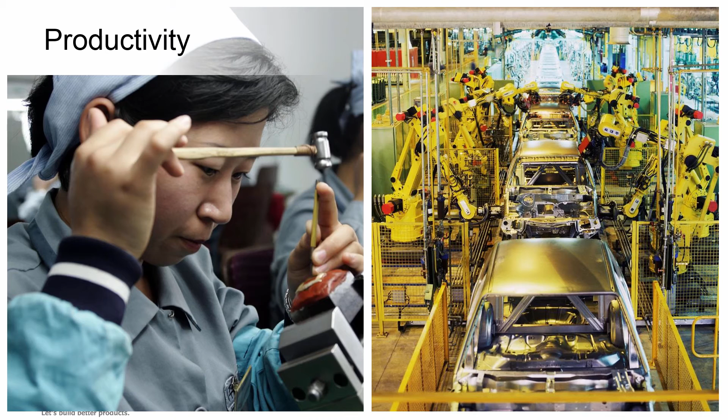And again, what's important for me is, I want to make sure we don't just jump in and show you the product, although I know that's important. That's probably what a lot of you want to see. But what I like to understand, especially as a customer of any product, is where is a company headed? Why is Autodesk, in this case, why is KETIV investing in building Inventor into more than just a modeling tool?

When you look at all of us today, and I work with many of the customers that I see on this presentation, for the most part, there's really three areas that all customers in manufacturing are looking to improve. You create a product, and you're either looking to increase your productivity, and there's multiple ways to increase productivity through manufacturing methods, the way you're assembling your product, the way information flows throughout your business. So, all of us have opportunity to increase productivity. That's pretty common with all customers.

The other common theme is just innovation, right? Most customers really want to come up with ways and develop their product that's unique, has features that are customer focused, and we see that every day. Whether it's a Google Glass or drones and new technology that's coming out today, things change so fast, we all know it's very difficult to remain the most innovative company in an industry. But again, it's something that a lot of our customers are striving to do. So we look at companies increasing process. Typically, they want to figure out ways to better innovate their product.

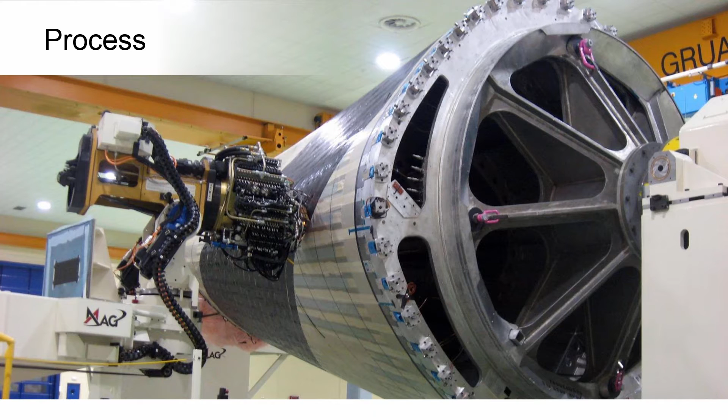And then the third is process, okay? And process can be improved through a variety of means. I mean, just looking at how information flows throughout a manufacturer. I was with a customer recently, and while the customer wanted to look at how information was managed in engineering, sometimes it makes sense to step back and say, let me take a look at how information begins in sales. How do I sell my product?

And then once I sell my product, how does that information move into engineering? And then we can kind of follow the information and see if there are areas in a business that we can improve. And so sometimes, like I say, it takes just stepping out of the engineering area.

But again, just to recap, productivity, innovation, process, as we talk to customers, those are common themes that all customers in manufacturing are typically looking to improve.

Now, what's happening in the industry, and many of you, I'm sure, have heard, some of you have already implemented and are seeing some of these impact the development of your product. But there are many trends, many new technologies that are becoming available, and becoming available to all size manufacturers, that are really changing the way we have to look at developing our product.

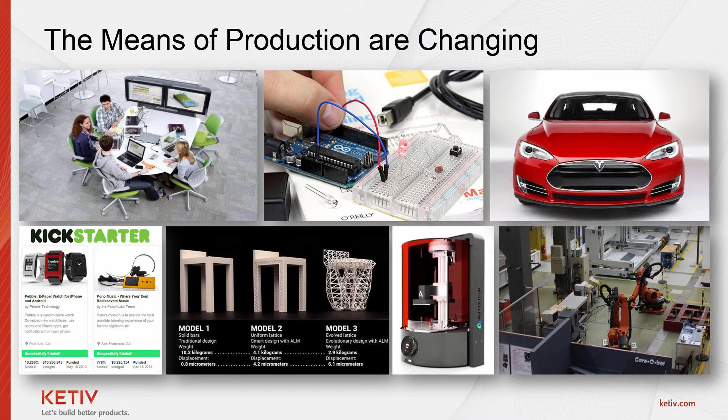Okay, and those trends really revolve around production, the demand, how our customers are looking at our product, what they expect from a product today, and then how those products are connected and stay alive, if you will, as we move forward. Okay, and when you talk about production as an example, I pulled up a few examples here that I'm sure many of you are familiar with.

The production methods around just the way we can 3D print products. I know several of you, I'm looking at the list of attendees, are used to and incorporating some of those methods today because the ability to rapidly produce a product, go from an idea to a real product, is making us rethink how we design a product.

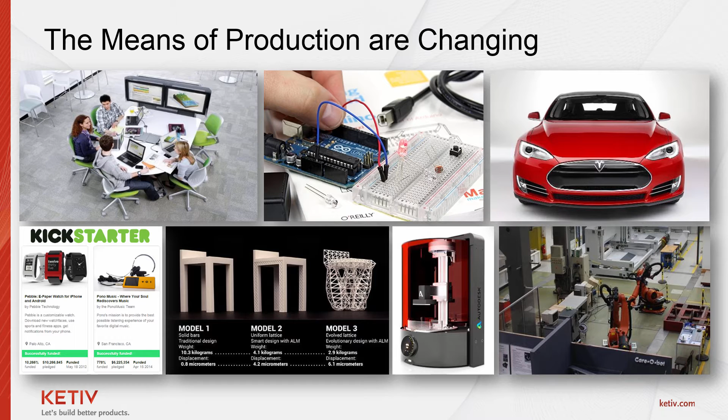So if you look at this chair down below, and Jorge will probably talk about this a little bit more, because technology is changing, because we have things like cloud processing available, this chair is an example where, as an engineer, rather than focusing on modeling a product, worrying about what the geometry looks like, I can now focus on the inputs of the product.

What is the criteria of the product? What sort of envelope does it have to fit within? How much weight does it have to hold? What kind of material is it going to be made from? And the computer can now create the geometry for me.

And if you look on the far right of the chair, you see a chair that looks like something likely no human would really imagine or design or model for that matter. But the computer has found that that is the optimal design, the optimal shape to meet the requirements necessary. The user did not do the modeling, the computer did. And these are things that are changing as we look forward and at the technology.

The other area is just product intelligence. All of us, I'm sure, are using products that are connected today. I have a home with Nest. We recently implemented Nest in our house, and the ability for me to now control the heat and coolness in my house from anywhere really has changed the way we use that sort of equipment in our house. It's reduced the electricity bill for heating and cooling the house.

And so all of us have examples, I'm sure, where we're using products that aren't dead products, if you will. They're really alive. They keep up to date on trends and habits and get to know how we work as individuals. And this is another area, again, that's forcing customers that I talk to to look at how they can better create their design and differentiate their design.

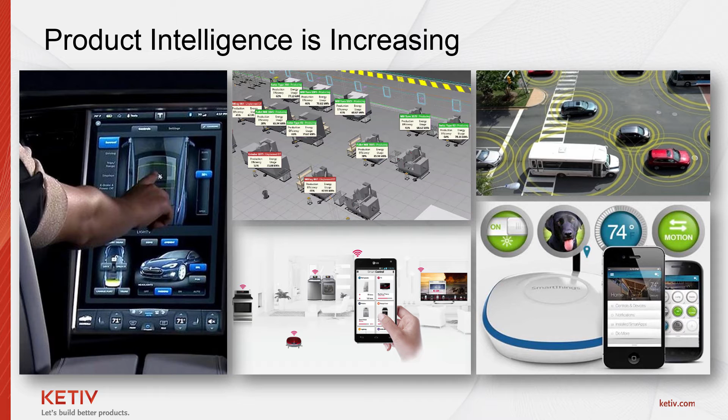Our customers' demands are also changing, and again, all of us are customers of something, right? Whether we're customers of a product or food or cars or whatever the case is, I think we can all think of examples of how our demands are actually changing for products we buy. I know when I go and buy products personally now, or with my kids, my kids are looking for something that is more personalized, something that is custom.

They want to have something that's unique to them, and that requires a different way of designing, a different way of presenting information to our customer, and then being able to ultimately produce that product in a way that's affordable and allows customers to purchase them.

And so, when you couple all of these things, you couple the customer demands, you couple the expectation of having products connected and how they interact with different devices and people, and you look at the way products are being made today and the abilities you have to 3D print, the technology available with robotics and other manufacturing methods, it's really a good time for all of us to kind of step back and figure out where our business is headed and understand how we can use technology going forward.

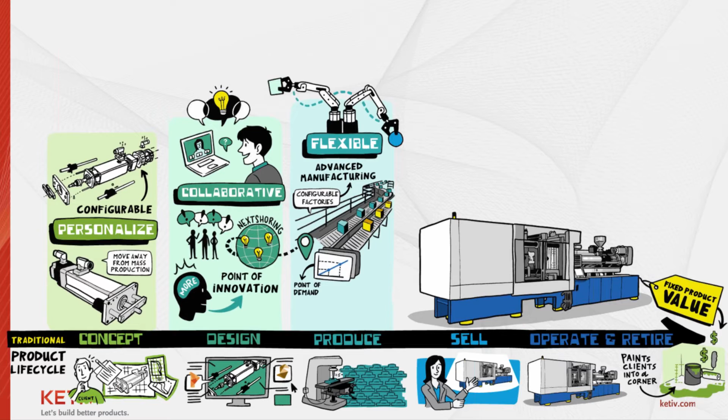So whether it's CAM, whether it's 3D printing, or how we assemble, how products flow throughout our factory, there are solutions within a foundation within Product Design Suite that allow us to build upon some of these new trends that are coming. Okay, and then we've talked about the customer. The customer expects more, right? The customer expects to sometimes be involved earlier in the process where collaboration will help.

The customer may expect to somehow configure or, like my kids want to do, personalize their product somewhat, whether it's through color, material, size, shape, and giving customers the ability to do that's important. And then sharing back with them what that product will look like in a real-life scenario is important as well. And again, those are ways Product Design Suite can help. And all of us will start to think of ways, if we're not already.

There's a couple of you on the call I know I've had conversations about this with who create industrial products, and they want to create industrial products that once implemented and installed in the field, report back to them so they can start detecting issues with that product prior to the product failing. Okay, so that if they can prevent failure out in the field, that's going to be a better experience for their customer. It's going to save a lot of time, headache, money ultimately for that customer and make them a better partner. And Product Design Suite has a foundation that is going to allow us to build and get to ultimately some of these connected product scenarios as we go forward.

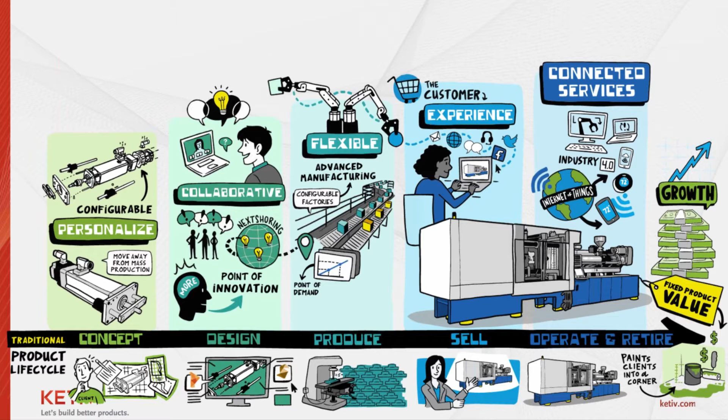So when you look at it, we all want to improve productivity. We all want to improve process and be innovative. If you set those aside and we really look at these other 5 opportunities for us, we can really start to think of ways of differentiating our companies as we go forward. And by differentiating our companies going forward, the lifetime value of our product increases.

Right? If I have a product that I can maintain in the field and is reporting information back to me, and I can be a better partner to my customers so that they prevent issues, that's going to present some opportunity for our customers. And it gives us a way of managing the overall development of our product in new ways going forward. Now, all of us cannot do all of this overnight. And that's why the Product Design Suite solution is a scalable solution that gives us the ability to work our way towards having all of this implemented within our company.

And that's really why Autodesk calls it a product innovation platform. Okay, it is a platform that allows me to scale, allows me to really identify in my company what areas I want to improve, and roll out those parts of the product that make sense to me. And when I look at Product Design Suite, there's really 4 areas that Jorge is going to cover that cover some of the differentiation we were talking about in my presentation.

And again, I want to make sure that everyone understands the goal of this is to share with you all the capabilities you have in Ultimate, because we find a lot of customers aren't aware. They're not sure how or when to implement it. Sometimes they only look within engineering in terms of how they want to improve. But really, I think all of us owe it to ourselves, to our companies, to look at how engineering interacts with other departments, with our customers, with our vendors, and look at ways we can improve the overall process.

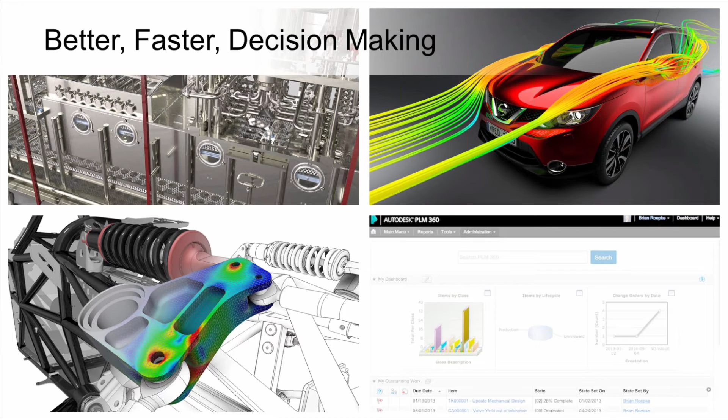But most of all, some of this is already available today inside of Product Design Suite Ultimate. So I wanted to take this time to go over it and make sure everyone understood some of the things we can do.

For example, I know we have a customer that does muffler systems, and I thought this was a great example to bring up to show you some of the capabilities inside here, something you might not necessarily think of all the time.

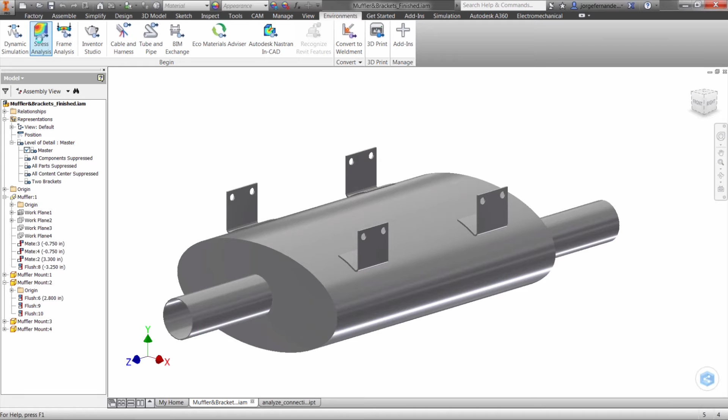So we have the ability to do FEA analysis. There's 3 different types: there's stress analysis where we do static stresses, and then there's also modal analysis. The example we're looking at here right now is a modal analysis example.

I wanted to show how easy it is to be able to begin something like this, to get started. We're in here, and we can very easily create a study where we specify we want to do a modal or vibration analysis.

We can say, well, this is going to be mounted on the bottom of a car, or some type of vehicle, and we want to make sure it's going to withstand certain vibrations or frequencies.

So we can look for those natural frequencies right inside of here, and if we know that range as well, we can give it that range and tell it to find where the specific vibrations will cause this possibly to fail.

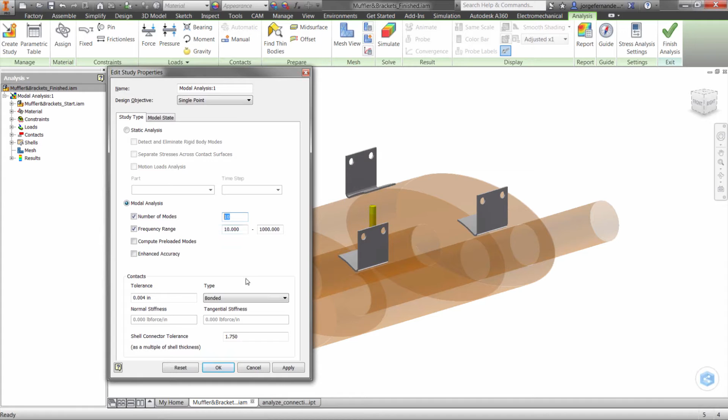By doing this type of work, we're able to get a lot of upfront design, and we're able to say how these things are fixed. Is this mounted? Is it welded up to something else? I could put in these different supports, add different forces.

And make sure that if there's another weight on top of this or something else that's going to also cause some type of change in this environment, we can definitely add those. We even get to the point of, hey, is this a really thin part? We want to make sure we have good results and we account for the thickness of the surface.

We have the ability to do all these things. And by the way, we also have something every Thursday at 10 a.m. called Autodesk Virtual Academy, where we go over an example like this so that you can follow along and see how you can do it, and we jump into greater detail.

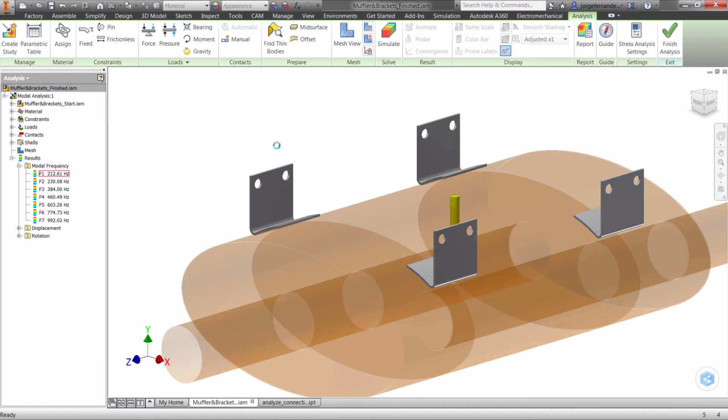In the end, once we've set this entire thing up, we can take a look at its results and see what happens at certain frequencies. At this frequency, for example, we can see that it rocks back and forth. If we just do a really quick animation, and hopefully over the lag of the internet you're able to see

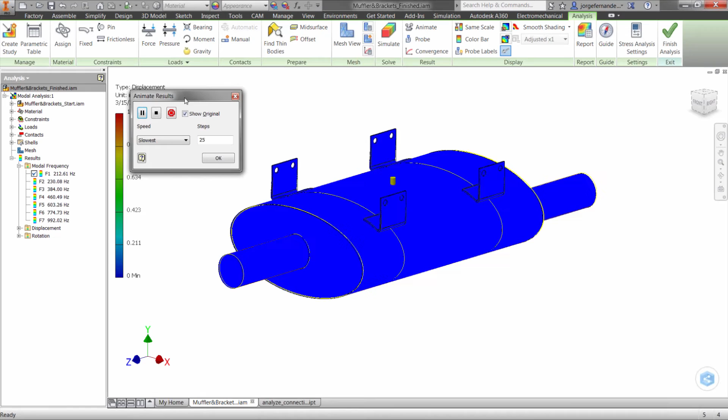this quite smoothly, I'll just play this, and what it's doing is rocking back and forth here on this frequency. The parts are still basically staying together, but we can actually see this movement, and there is a maximum displacement of just over an inch, actually.

So these are the types of things we can start to look at while we're inside of the FEA analysis of Inventor, for example.

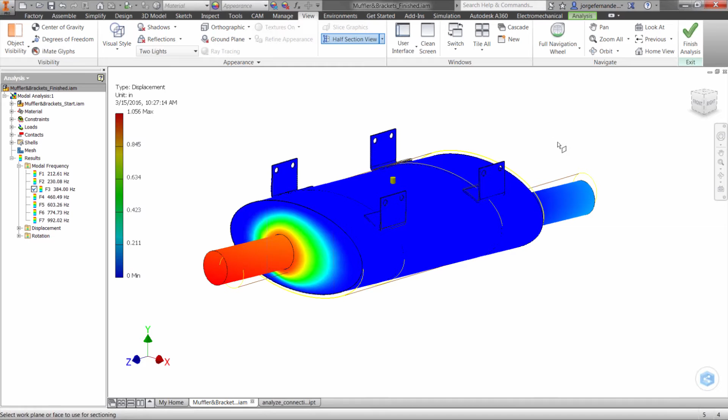Something really nice about this is being able to identify what's going on at different levels. I can see there's another vibration, and maybe I want to take it a little further and see inside of it. Using regular tools inside of Inventor Professional, which is in Product Design Suite Ultimate, I'm able to very quickly get a section view of what's going on with the insides. The tools are available for you to interrogate this completely and see what kind of results you might expect.

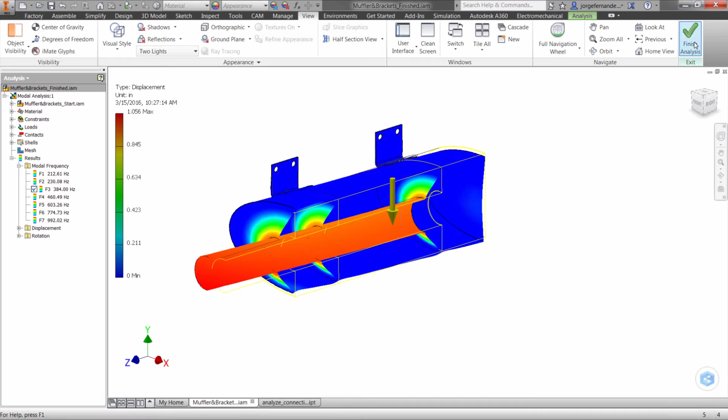This is just one example I wanted to show you. This was the vibration analysis, or modal analysis as it's called. But there's many others we can do also.

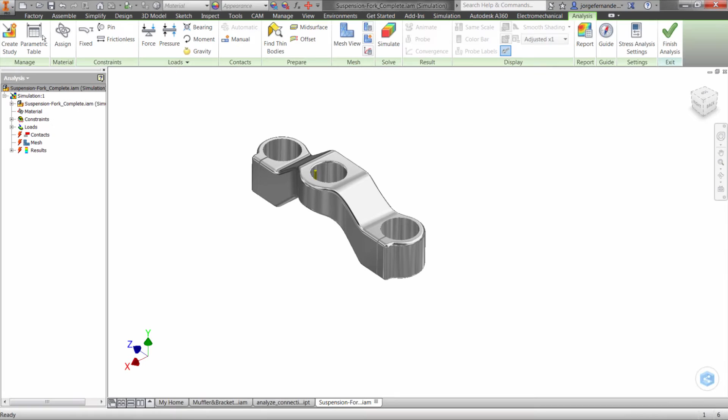If we go to this other quick example, we're looking now at a suspension fork for a bicycle, and the impact it might need to take on. We're able to go to our environments and our stress analysis environment to take a look at the static stresses of this. I can easily update some of my contacts to make sure any assembly contacts are accounted for. The computer breaks it down into different elements so we can see the results of this as well. There's so much capability here.

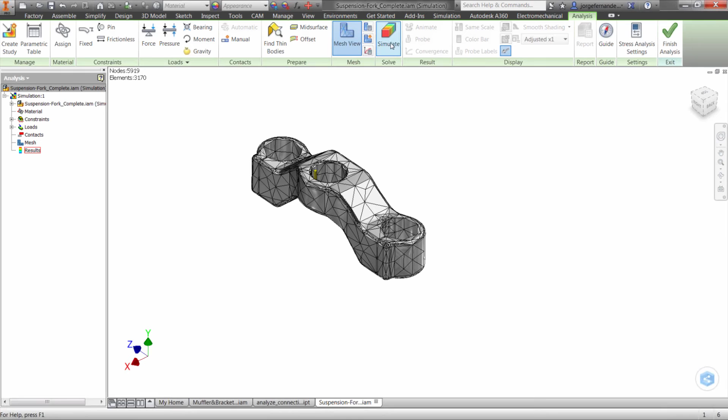This is another great example of something we did in Autodesk Virtual Academy, where we actually walked you through how you can do this on your own, including what we call a parametric table, where you can run different thicknesses.

Sometimes it's not about using less material just for cost savings, sometimes you just want to make it lighter. We want to make this bicycle as light as possible. If you think about someone doing any design where something has to be carried or shipped, we're not just trying to do cost savings on material. It might even cost more to add holes, but keeping it lighter is what the customer might want. So here we can see what the stresses are, what the displacements are, and we can anticipate what issues we might come across without necessarily doing a physical prototype.

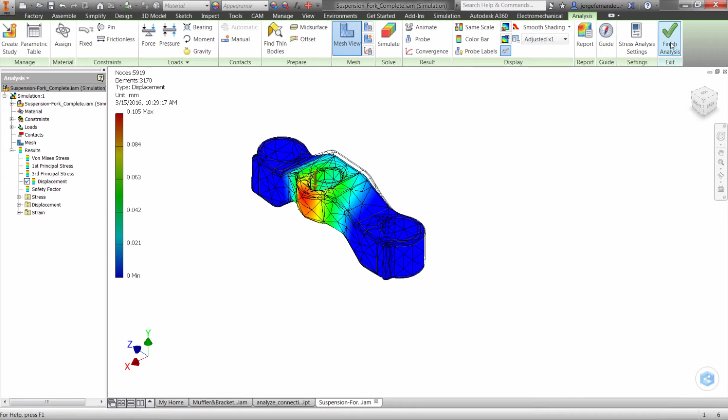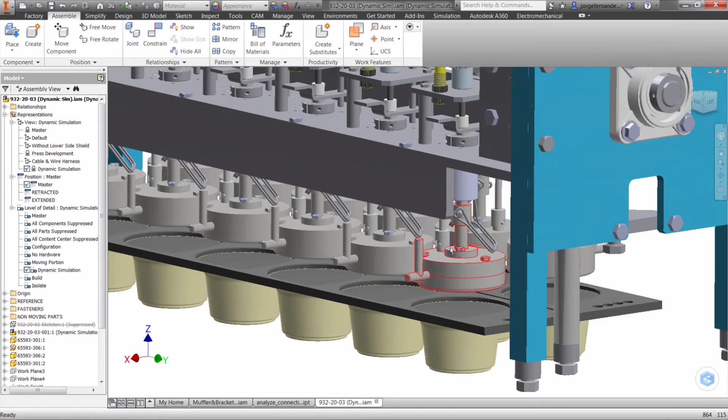One other example I wanted to run through is the ability to do a dynamic simulation inside of Inventor Professional, looking at kinematics. In this example, we're looking at a customer that does yogurt filling cups, like the ones we've all bought at Costco or another store, and how that gets filled. There are things going on in here, and we might need to look at the dynamic simulation to understand the kinematics.

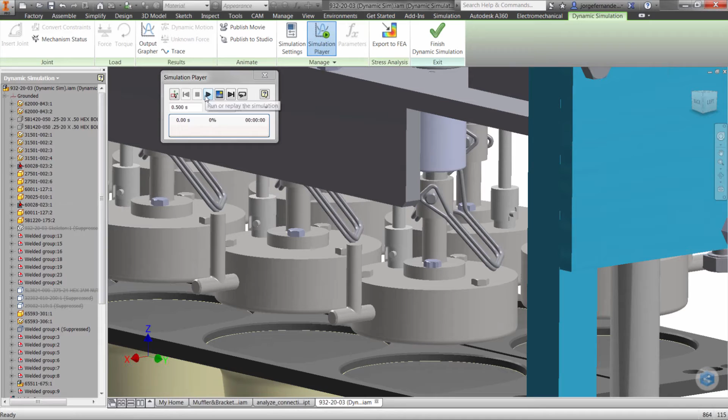We want to understand that if this pin hits down at the bottom, what kind of stresses is it going to take? Is it going to start to fail? What kind of displacement can we expect? This allows us to apply those forces and anticipate what might happen if we were to run this scenario. We can hit play, and the entire piece of the machine comes down and realizes there's a contact going on, then outputs the stresses so we can go back into static stress analysis.

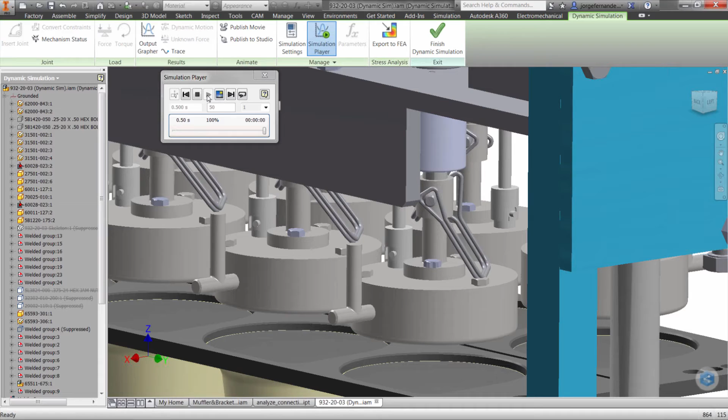It's all about making better products and making it faster, because you can do this all up front. You don't have to wait until the end, and you don't necessarily have to bring up a different simulation program to do all of this. It gives you great capability to do this up front as well.

Jorge, if I can interrupt before you go to the next one. The other advantage I really want to emphasize is that these tools allow you to create a better product, which is the ultimate goal—test your product early in the design phase and create a better product. I'm an engineer myself, I started as a designer creating products, and when I started my career, there was a modeling or design department and a separate drafting department.

As we move forward, design ultimately created the drawings, and there aren't many manufacturing companies with drafting departments today.

From there, we saw modeling move into more of a digital prototype—being able to not just create a model, but test the weight, look at it, share realistic images with customers, and really understand how the product would behave. As we go forward, we'll start hearing more about how setting up an accurate problem in a system will create geometry for us.

So, all of you using Inventor today and not using simulation, I highly encourage you to start. Obviously it creates a better product, but it's also for your own knowledge—your ability to test and learn how to set up problems correctly so the solve comes out right.

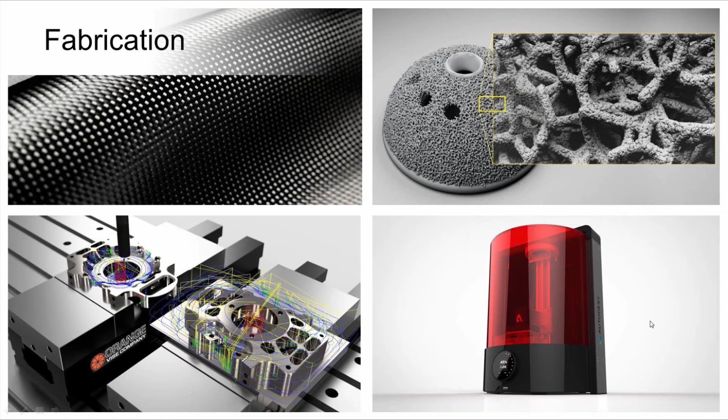There's an acquisition Autodesk made, which was HSM Express and Delcam. HSM Express is actually part of your subscription—you can download 2.5 Axis CAM today. We have a tech tip on that, so if you have questions, let us know. You can download it and start using it today. It's embedded inside of Inventor, so you don't even have to exit the environment.

Some people have asked for 3-axis CAM—you actually have that too. The thing is, 3-axis CAM is part of Fusion, so there's no extra cost; you have access to that today. Again, we have white papers on how to get it downloaded and installed and how to use it, but you have that today.

The other part of manufacturing is 3D printing. As parts get more complex, or as we want fewer or faster physical prototypes, we can leverage 3D printing. And how we can do that today is through the environment inside of Inventor.

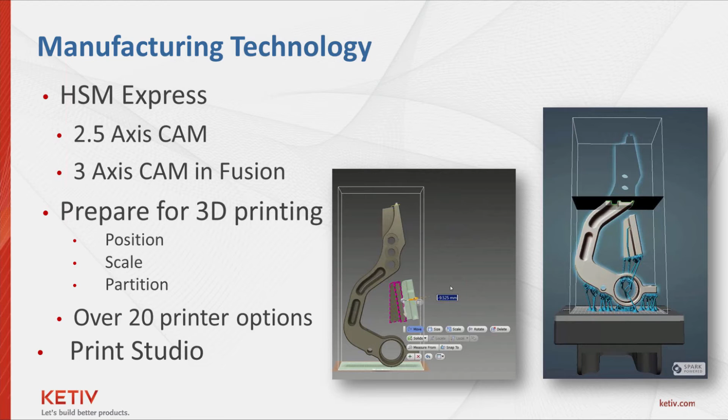I'm not sure if you're already aware, but there's a tab inside there—let me bring it up really quickly to show everybody how easy it is to get to. If I go into a part I want to look at, say I wanted to do CAM or 3D printing on this—once you bring it up, you'll notice there's a CAM tab where you can begin to set it up. It's actually a pretty easy tool to use. We've discussed this in Autodesk Virtual Academy on the Fusion side too, and it's very similar.

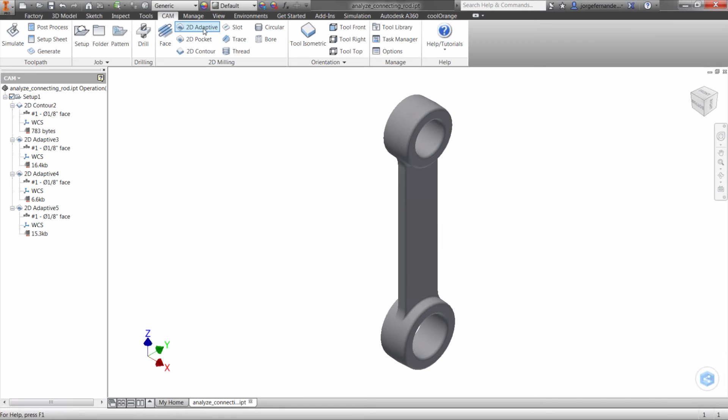This will basically allow us to go ahead and simulate this part and how it would act in CAM, where we can set it up. We can go ahead and do some adaptive milling, for example, drills and so forth, to be able to simulate this entire CAM operation and then export the code out.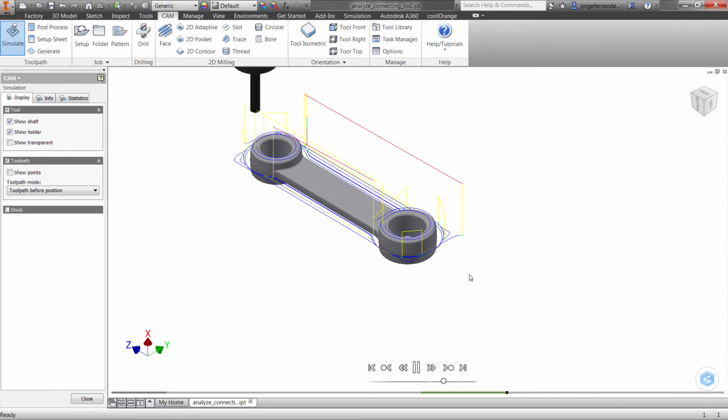So it's really easy to come in here, set up the adaptive clearing, for example, and maybe some facing and things of that nature to be able to see exactly what it's going to look like, verify that the toolpaths are correct, of course, and then finally be able to send this out also to do the CAM. That's just one part of it if you're going to do CNC, but if you want to do 3D printing, again, that's something we also have available.

Inside of our environments, we have the ability here to go to 3D print. And what this really does for you is to be able to give you, again, upfront validation of the part. Maybe you want to make sure you have the right size for it, for example. Set the orientation. In this case, I can obviously see this is going to exceed the box limits if I lay it down on its side instead. But I can come and change the orientation for that, change its position, and decide exactly how I want to use it.

At the same time, I can come over here and choose what I'm going to output it to, which 3D printer. I worked with an Autodesk Foundation company where they provide pumps to remote areas in Africa, and they were creating a new valve. And there was nothing like printing it out and seeing exactly what was going to happen. It had threads and everything, and we were able to actually have the threads interlocking and verify the design. So it's one thing to see it in 3D right here, but there's nothing like being able to 3D print it out and get better verification of what you've got going on.

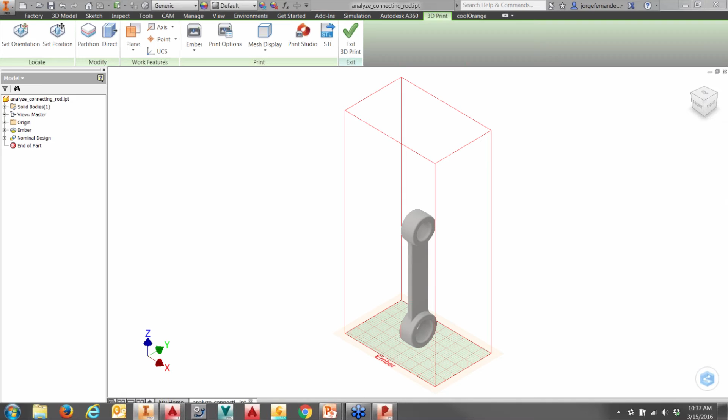At the same time, we also have something called Print Studio. So if you click on this link, it actually has you download this, and it'll send this to Print Studio so you can actually slice this and see how the structure is set up for it. So again, more validation, make better informed decisions to see exactly what you're going to expect, especially if you're not used to doing 3D printing. I've done a few projects myself, and I'm dabbling in it more, but this gives me more confidence in the parts that we're creating, and these are tools that you have available to you today.

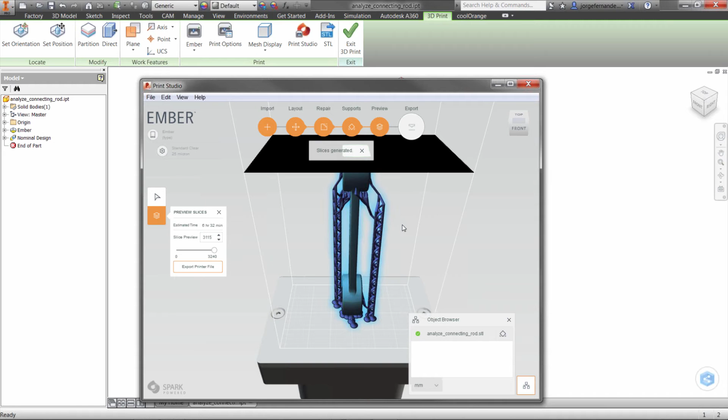Next thing I want to talk about really quick is the digital physical convergence, and what this really means is, Autodesk is really pushing, everyone is pushing the envelope, right? The more automation there is, the more electronics get incorporated into the designs. You might not even see it today in your product, but you might have it in the foreseeable future. So the ability to design and document electronics, for example, mechatronics and hydraulics and so forth, can be very important as well. So we have that ability inside of Product Design Suite Ultimate.

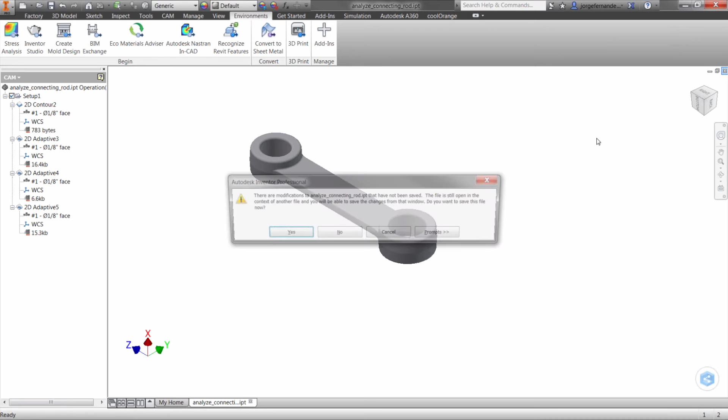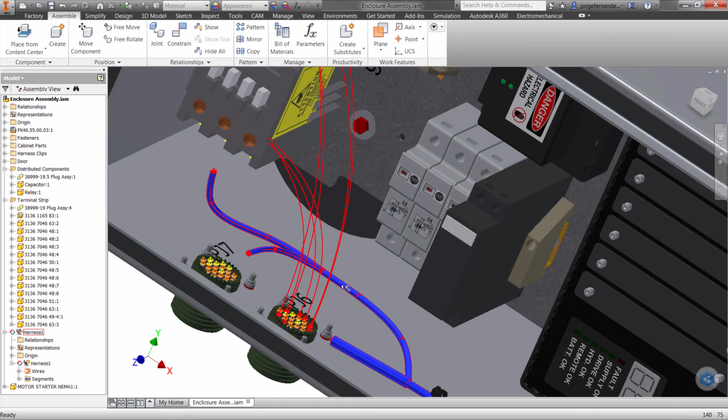And the way that comes is in the fashion of having AutoCAD Electrical and 3D wire harnessing built into the suite as well. So by doing this, we're able to do, let's say, an enclosure that has the actual wire harness, provide wire lengths and know what our costs are going to be, as well as make sure we have the right amount of real estate for the wire harnesses. So in here, for example, we're seeing this enclosure of a tractor actually, and we're able to see all the wires inside of it. But how do we get there? How do we get the actual 2D wires and everything?

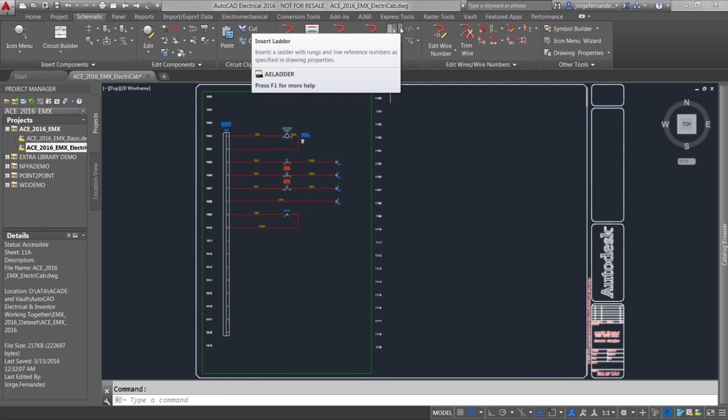Well, we have AutoCAD Electrical for that. So this is AutoCAD basically with electrical tools on top of it. Now some of you might just use AutoCAD, some might use Visio, but if you have Product Design Suite Ultimate, you already have access to this. And it gives you a very quick and easy tool to insert a quick ladder, for example, insert wires in here, or even come over into a catalog browser and say, well, I'm looking for a very specific connector or a very specific motor starter, and find it inside of here and quickly just click on it and drag it into my actual schematic over here.

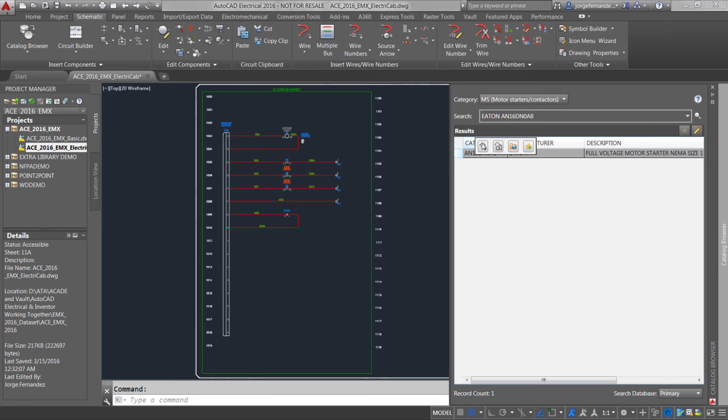So it's really easy to use. It gives you all the tools you need, the manufacturer information and everything, along with wire numbers so you can tag these and be able to print out wire labels even. You know, some of you might do the electronics and mechanical part of it, or you might have an electronics team that takes care of this.

But now you have the tools to be able to collaborate much better, be able to figure out exactly where you are in the design, what parts are connected by looking at these symbols to know, hey, this part has not been connected to Inventor yet. I have an Inventor part and an electrical part. I just need to go ahead and make those links between them.

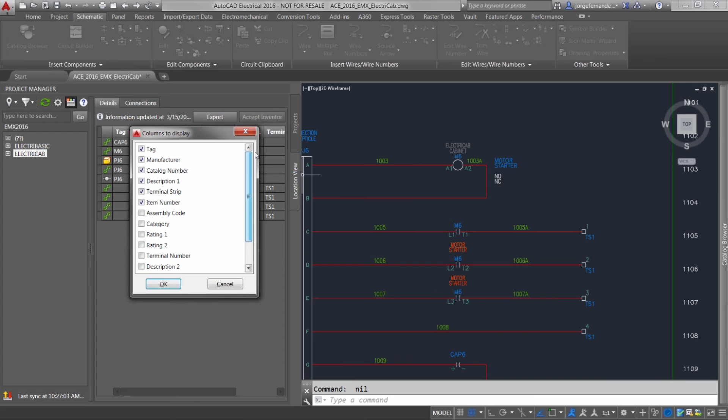I can even come over here and say, well, I want to add more things. Maybe I want to add the actual wire length. I'm sure a lot of you didn't realize that we can actually do that now. Before in AutoCAD Electrical, if we didn't have this collaboration, there were no wire lengths. You'd be guessing. Now we can actually have it come up in the columns, so we can export this and put it out into a from-to sheet from AutoCAD Electrical.

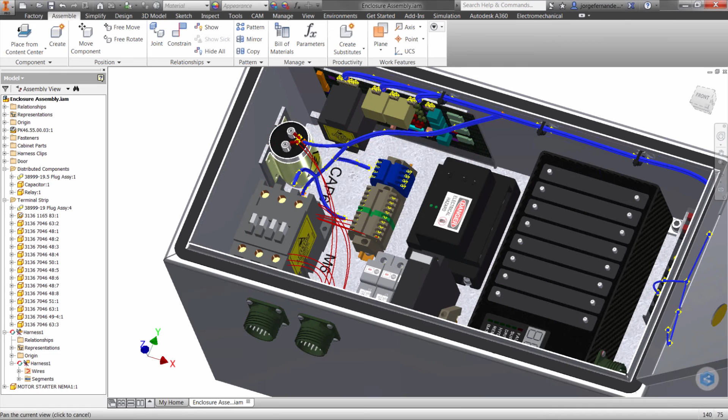And then finally be able to sync this up so that when I go back into Inventor, I'm able to see those things. I'm able to come in here and start accounting for the real estate we need and just automatically route all my wires that have not been routed yet, and then create my nail board design.

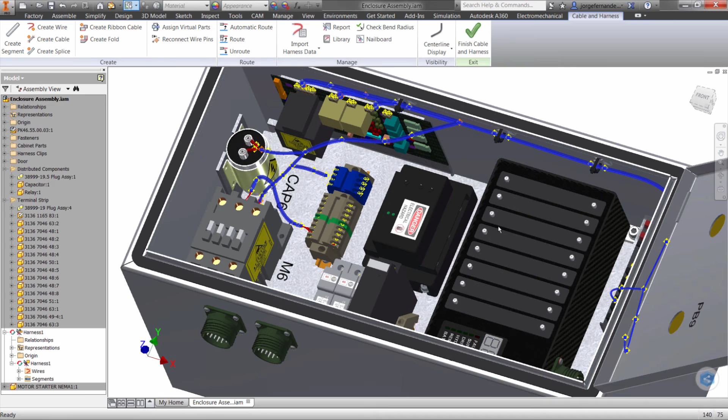I've gone out to companies where they'll have an actual board up with everything nailed up to see what the wire lengths are. We can get that all right here by just using our Product Design Suite Ultimate. Again, the idea here is I just want to make sure everyone knows that they have this capability available to them already.

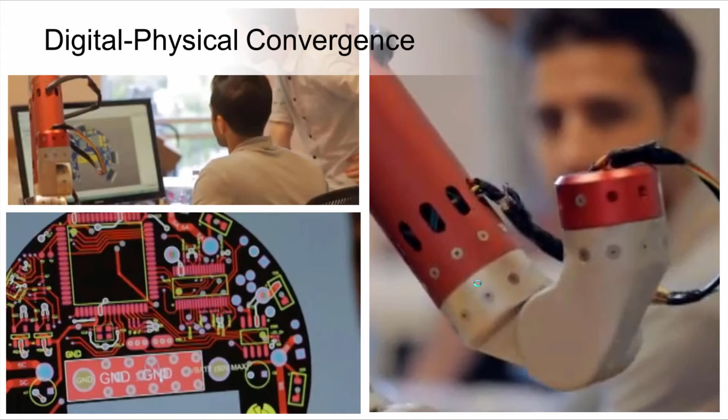And the last thing I wanted to talk about was collaboration. So, Anthony was mentioning being able to collaborate with other people within the organization or outside of it, and how we do that today. Some of us might already be using Vault, for example, for some of that collaboration internally, or even externally. But there are some things available today as well. In case you haven't got notification yet, there is an R3 version of Inventor 2016 now,

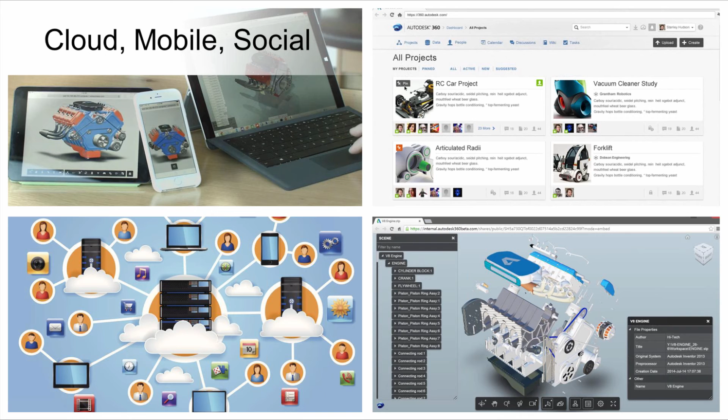which includes some of this. Not sure how many of you have heard of Autodesk A360; it's kind of like a Dropbox, if you will. It's Autodesk storage space where you can collaborate with others socially and share your designs and so forth. So what we're seeing here now is inside of Inventor, there's the ability to say, well, I have an assembly here, and I only want to isolate certain things that I want to show somebody and work with somebody on. So at the bottom right-hand corner, there's a little collaboration button.

What that does is allow us to turn on our connected design on A360, where we can comment, go back and forth, and share this information very quickly without having to export to another file type or anything like that. Instead, we can put in our comments here and generate a preview. If we stop and think about how we've done this in the past, usually we export a file to a DWF, or we might Pack and Go it and have someone download Inventor View, and sometimes they come back to us because of an installation issue and couldn't quite get to it.

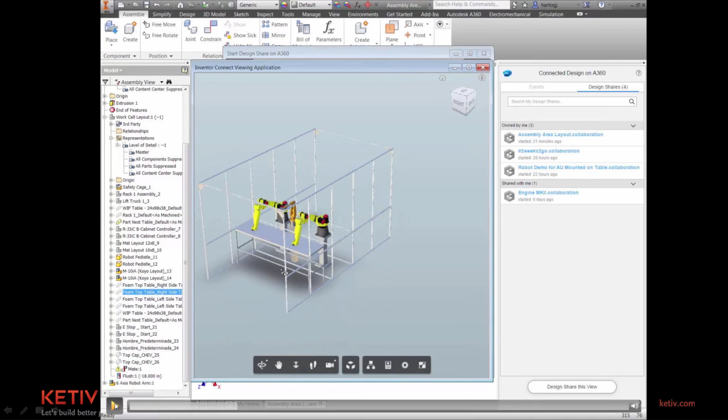But now we're able to leverage the cloud and say, well, I'm just going to email a link. They will access my A360 account and be able to see this design. I can go ahead and share this view now with somebody else. They get it in anything like Gmail, open it up in their browser, and they're able to see the design that you've been working on.

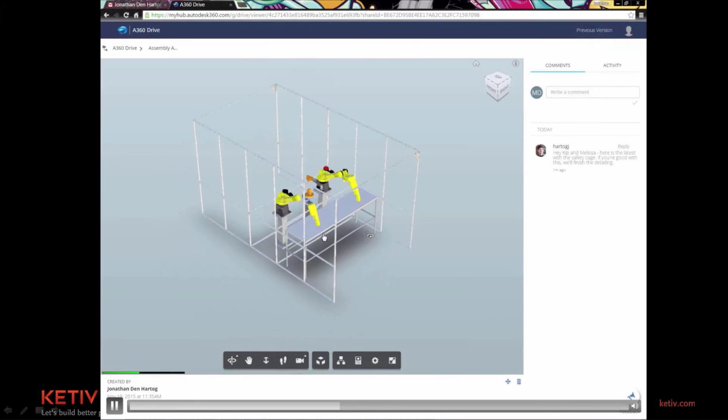They're able to zoom in and out and interact with it. They can even do exploded views of it, so they can see what's going on with this assembly or the insides of it as well. Comment back and forth and collaborate much more easily than ever before.

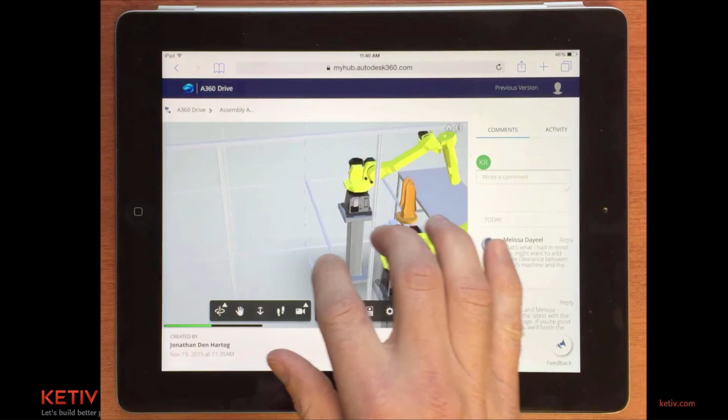As a matter of fact, you can also use this on an iPad or an Android, whether it's a phone or a pad. You can come in here and see the exact same thing we just saw a little while ago on our standard web browser inside of a computer. We can do it from pads and, as long as we have an internet connection, get to this information quickly; we'll be able to see it, interact, and collaborate with everybody much faster. Again, this is something that you have the capability of using today with Product Design Suite Ultimate.

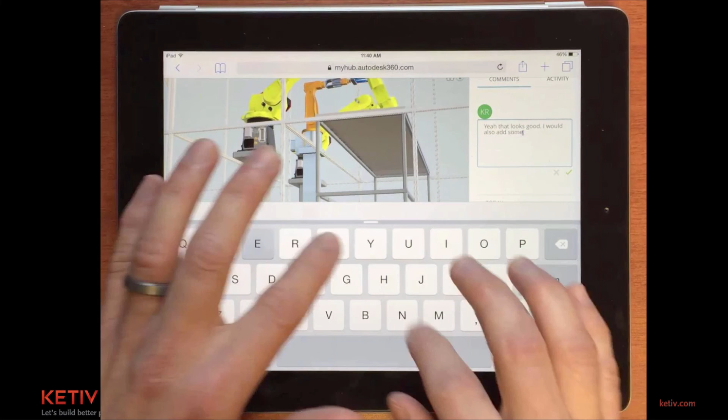So with that, I'd like to pass it back to Anthony. Thank you for joining us in this part of it. I just wanted to make sure that we are just skimming the surface here of some of the things that are available inside of the Product Design Suite Ultimate. And if you had more questions technically about some of the other things you have available to you, I'd be glad to answer those questions in the Q&A session coming up soon.

Great, thanks, Jorge. And I want everyone to realize Jorge asked for a lot more time. I know we've already gone over, but there's so much to show that he had to pick some of his favorite capabilities. There's a lot more on each of these topics. So if you have more questions, you want to know if something can be done that you haven't seen, definitely reach out to us. And I wanted to just wrap up quickly with some of our recommendations.

First off, if you're not on a suite today, the suite as we go forward is going to be the best place to be as a customer, right? You have access to the tools Jorge showed you. You get the most value for the investment that you make. And if you haven't considered that and you're still on an individual product, I highly recommend you reach out to your account manager, reach out to me or Jorge, and we'll definitely go over all of your licensing and give you a recommendation.